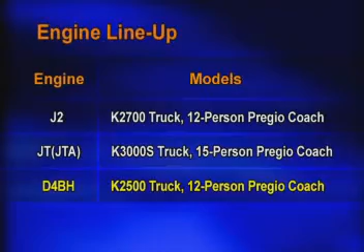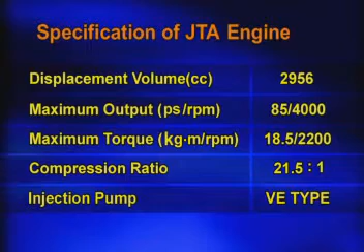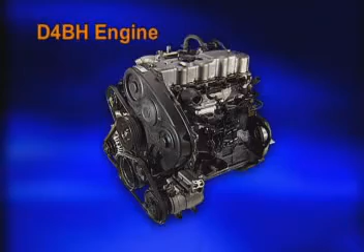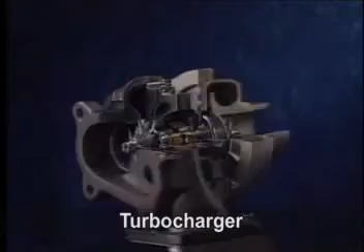Second, the engine structure. The D4BH engine is shown on the screen. The EGR cooler is installed at the EGR system, the recirculation system of the exhausted gas, to minimize NOx emission. In order to enhance the intake efficiency of the engine, the turbocharger and the intercooler are installed so it can generate high output power.

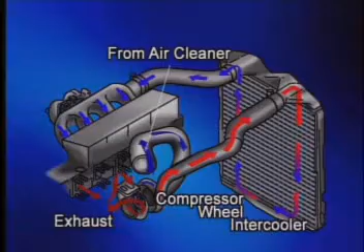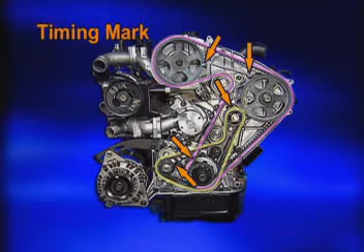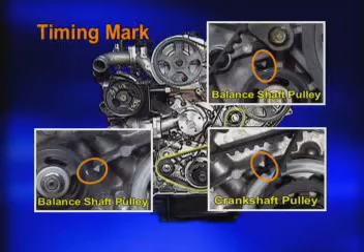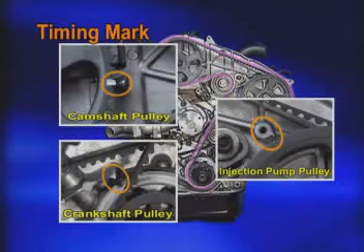Now, the timing belt of the D4BH engine is shown on the screen. The timing marks are all 5 points. When you assemble the timing belt, set the timing mark as shown on the screen. First, the timing mark for assembling the connecting belt between the crankshaft pulley and the balance shaft pulley. Next, the timing mark for assembling the connecting belt of the crank pulley, the camshaft pulley, and the injection pump pulley.

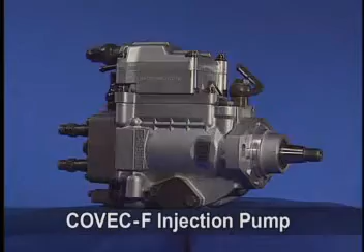Third, the fuel system. The fuel system of the D4BH engine is equipped with the COVEC-F injection pump. The COVEC-F injection pump is the electronic injection pump electrically modified from the VE injection pump of Bosch. Let's study the fuel line configuration of the COVEC-F system.

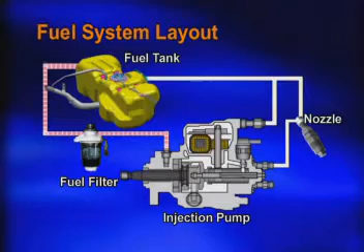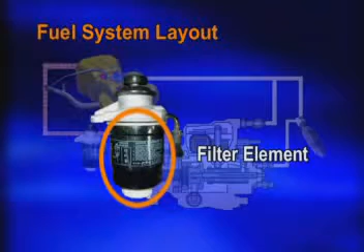The diesel fuel stored in the tank is supplied to the injection pump through the fuel filter. The fuel filter assembly comprises the filter element filtering out foreign materials and the priming pump supplying fuel manually. At the front side of the injection pump, the feed pump for fuel injecting is installed.

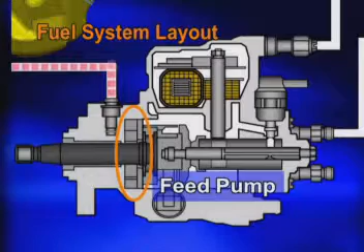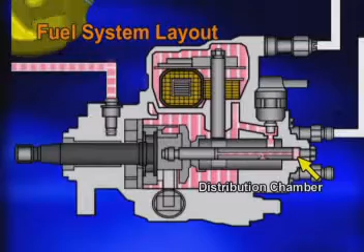Fuel injected by the feed pump will be filled at the high-pressure chamber of the injection pump. At that time, if the fuel cut solenoid is energized, the inlet port is opened so that the fuel in the high-pressure chamber is supplied to the distribution chamber. The fuel supplied to the distribution chamber is sent to the nozzle while being pressed by the reciprocal rotational movement of the plunger through the delivery valve, and then sprayed into the chamber.

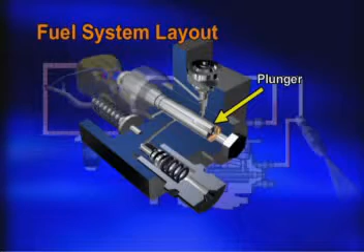The remaining fuel after spraying at the nozzle and exhausted fuel at the overflow valve of the injection pump is returned into the fuel tank.

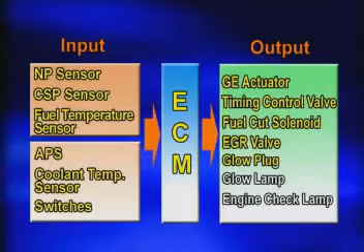Receiving signals from these sensors, the ECM controls the GE actuator and the timing control valve, as well as the fuel cut solenoid, EGR valve, glow plug, glow lamp, and the engine check lamp.

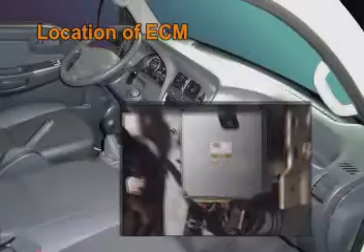The locations of the ECM are shown on the screen: the ECM location of the K2700 truck, and the ECM location of the Pregio coach.

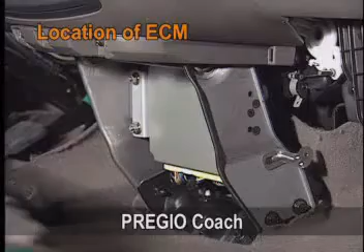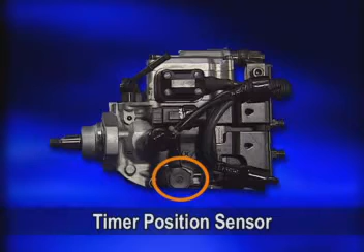First, let's look at the important sensors. At the injection pump, the NP sensor, control sleeve position sensor, timer position sensor, and fuel temperature sensor are installed.

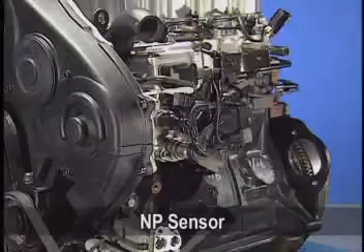Sensing the RPM of the injection pump, the NP sensor sends this signal to the ECM. The ECM treats this signal as a sub-signal of the engine speed.

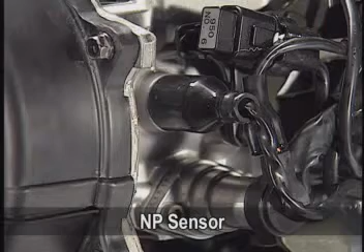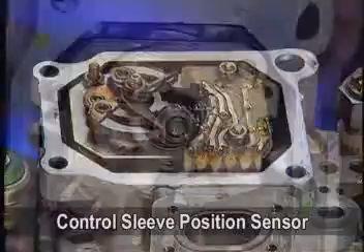The control sleeve position sensor, located at the upper part of the GE actuator, is the sensor used to feedback check if the electrical governor is operating correctly.

The timer position sensor is located at the lower pressure side of the timer and detects the position of the timer piston to perform the feedback control.

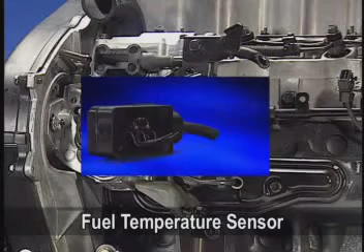The fuel temperature sensor is located inside of the injection pump and detects the fuel temperature to compensate the fuel amount.

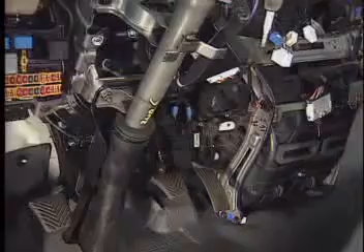Let's study about the sensors equipped to the vehicle. The accelerator position sensor is located at the upper portion of the accelerator.

Inside the accelerator position sensor unit, there are two idle switches. The sensor connector is comprised of 5 terminals. 3 of them are terminals for sensors, and 2 are terminals for the idle switch.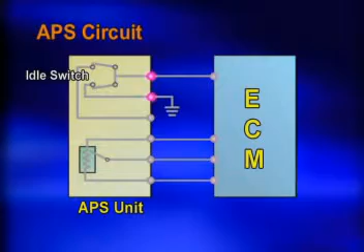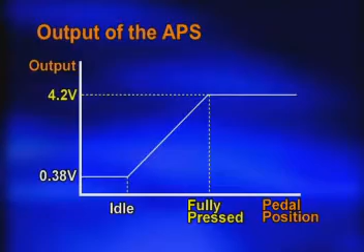The output of the accelerator position sensor is shown in this figure. When the pedal is not pressed, it will be 0.38 volts. When the pedal is pressed fully, it will be 4.2 volts. If the output voltage is less than 0.2 volts or more than 4.93 volts, it is treated as a sensor malfunction.

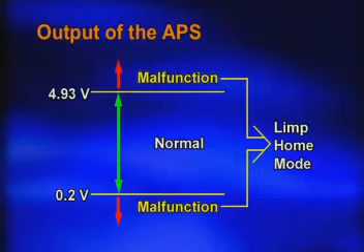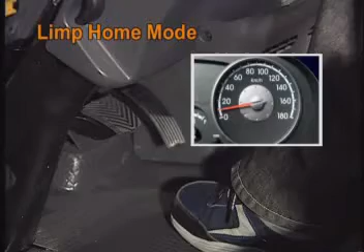It will then be in the limp home mode. In this mode, when the idle switch is off, the ECM supplies fuel at 10%, whereas when the idle switch is on, the ECM will cut the fuel off. Using the limp home function, the driver can move the failed vehicle near to a workshop.

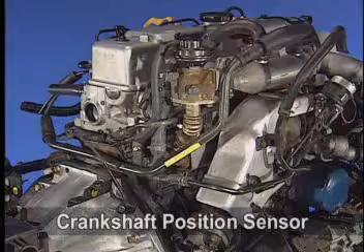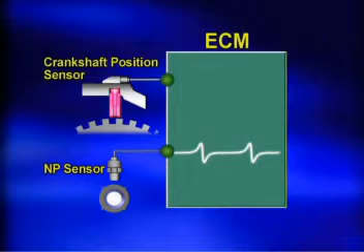The crankshaft position sensor is the main sensor detecting engine RPM, and it's installed at the transmission to detect the rotation of the flywheel. If the crankshaft position sensor fails, the ECM calculates the engine RPM using the output of the NP sensor. If these 2 sensors both fail at the same time, the engine will be stopped.

The coolant temperature sensor is installed at the same position as in the engine with the conventional VE injection pump. The ECM compensates the fuel amount according to the coolant temperature and determines the preheating time.

The boost pressure sensor and the air temperature sensor are in one body. These sensors are installed at the intake manifold and detect the temperature and pressure of the intake air.

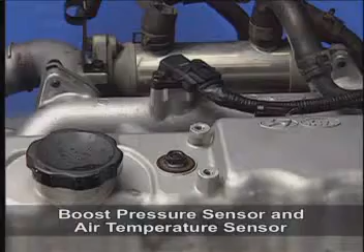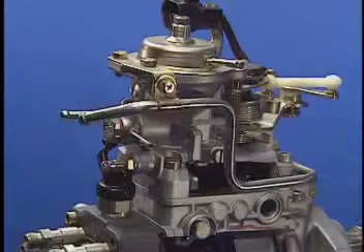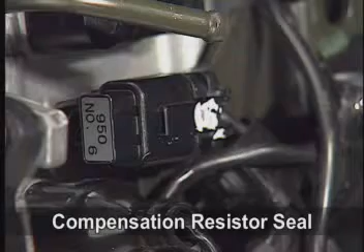As an input element, a compensation resistor is installed at the injection pump. The compensation resistor has the same function as the full load adjustment screw of the VE pump. As the compensation resistor is sealed, it cannot be touched unless in a special injection pump shop having exclusive equipment. Be careful if this seal is damaged, as the warranty will be voided.

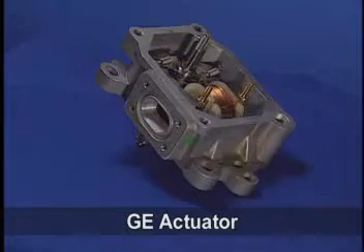Now I'll explain about the important output devices, such as the GE actuator, that is the electric governor, and the timer control valve. The GE actuator, the electrical governor, is installed at the upper part of the injection pump and controls the fuel injection amount.

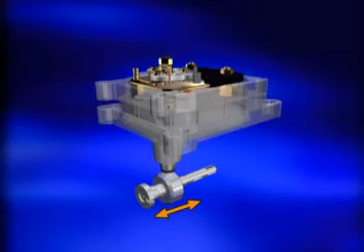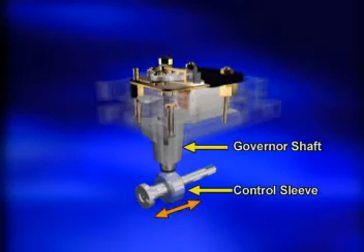The ECM plays the role of increasing or decreasing the fuel amount by moving the control sleeve to the left or right direction, by rotating the governor shaft, whose center is eccentric, using duty control.

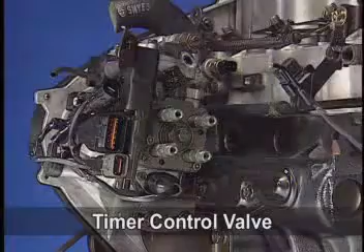The TCV, or timer control valve, is installed at the rear side of the injection pump and controls the fuel injecting timing. The ECM varies the amount of valve opening according to the duty and current value and moves the timer piston to the left or right side to control the fuel injecting timing.

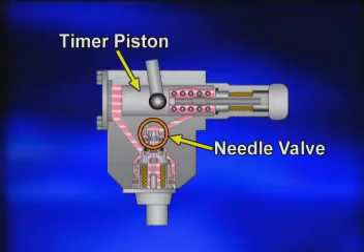Finally, I'll introduce the engine current data of the HiScan Pro. Current data is comprised of 20 items. I'll explain about some important data.

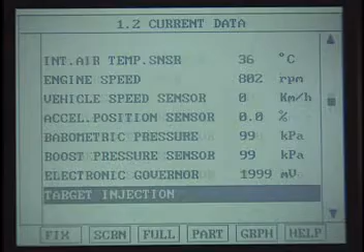The electronic governor shows the position of the control sleeve, which is changing the fuel amount. The target injection is the proper fuel amount for the engine load. The numeric number shown on the screen is the value acquired at every stroke of 1,000 times, because the fuel amount for one stroke is too small.

The timer position sensor is represented by the distance the timer piston is moving by the timer control valve, shown as a numeric value.